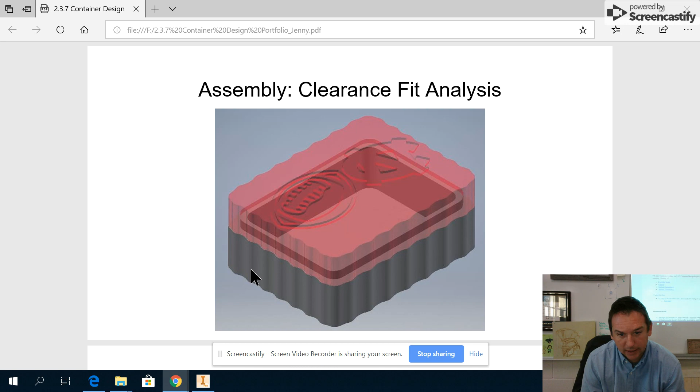Today is the last component of your portfolio for your container, other than the writing reflection statements: your assembly. So you can also analyze clearance fit in the assembly process. There's a lot of things you can analyze in assembly, but specifically for us, we can also analyze the clearance on this. So let's get started. This is a quickie.

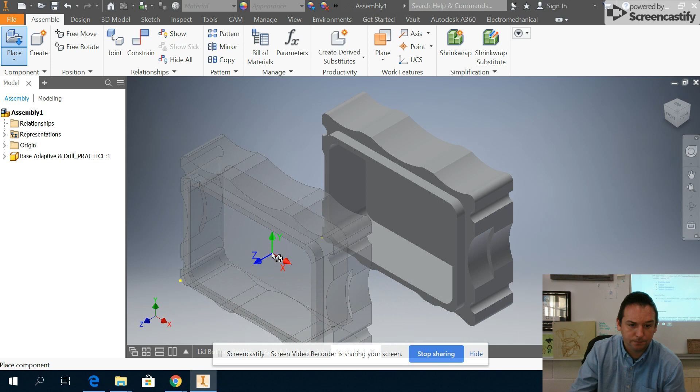So file, new, assembly. You do have to have both your parts complete. You're going to place, find your base, open. Okay, so you can left click and then right click and OK when you're done. Place your lid. Just right next to it's fine. Right click OK when you're done.

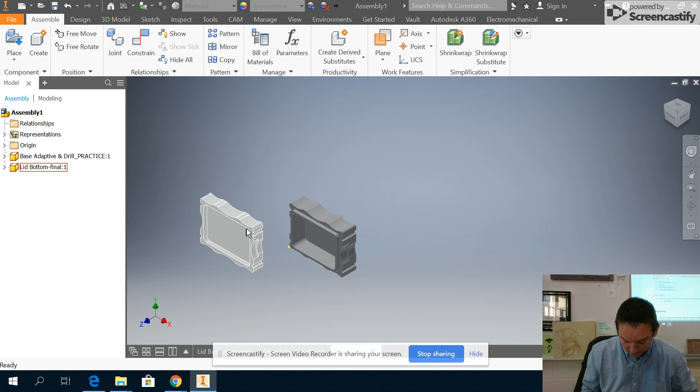And now, if you remember this from Intro to Engineering Design, you're going to apply one mate and two flush constraints. So mate is like gluing surfaces together. So you can mate the top surface of your base right there to the surface on your lid. So we'll apply that by selecting constrain. If you hover over these icons, they tell you what they are. So there's the mate option. And then when we do the flush option, you'll just select this.

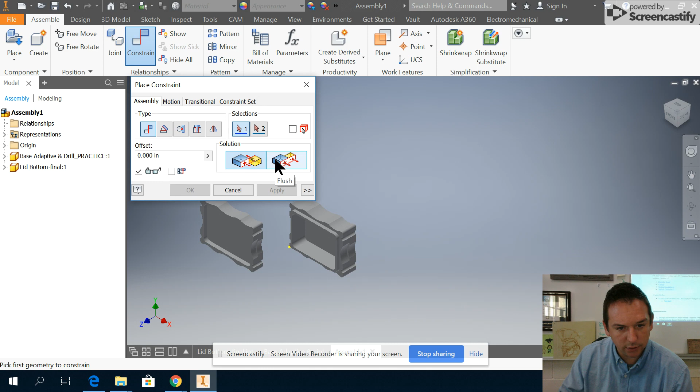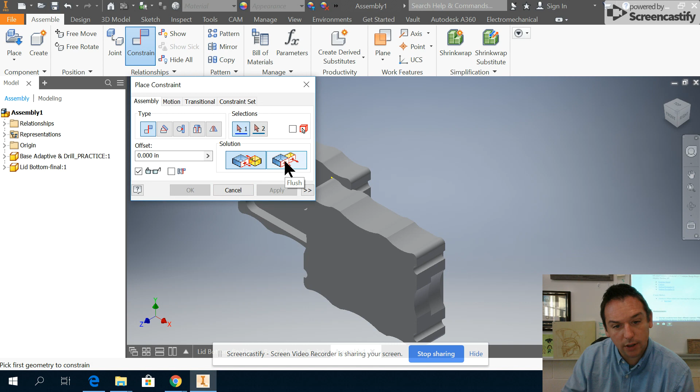So first is the mate. So again, let's try to mate this with this surface and then apply it. If you don't apply it, it won't work. Next, we're going to flush. So let's go back to constrain, select the flush operation, and basically it's aligning surfaces together. So we're going to align this surface and this surface together, apply, and I'm going to go out of it, and you can kind of see now they're aligned together.

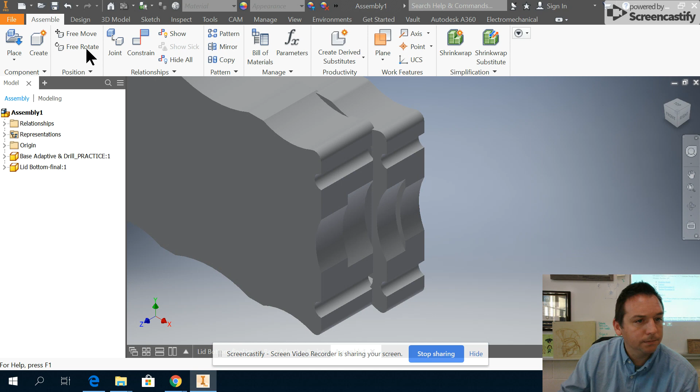And we're going to do the same thing for these outside surfaces here. Constrain, flush, outside to outside, apply.

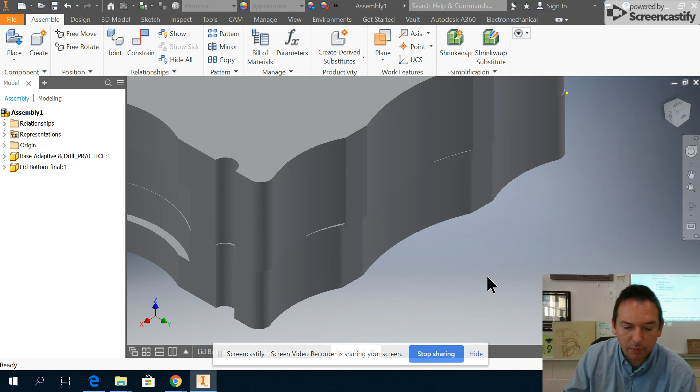So you can analyze using the view cube. You know, there seems to be some misalignment, so there's some issues there that are concerning. Probably not enough for me right now to restart the whole project, because that would require a lot more extra time. So it's a flaw that I probably would fix if I'm going to sell the product, because if I'm selling the product, then there's no room for error, right?

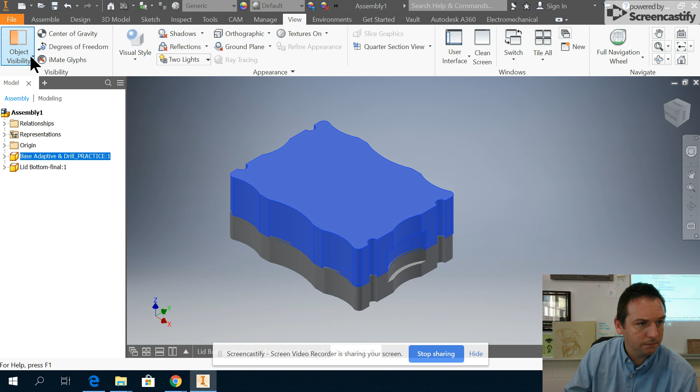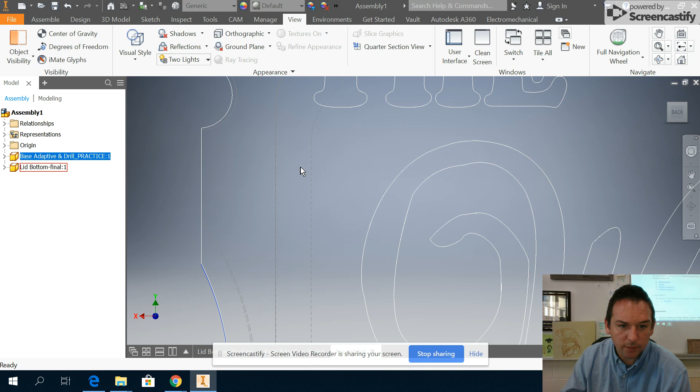So next thing you can do is analyze the assembly. Shaded with hidden edges. Let's see here. Wireframe with hidden edges. Kind of like that. You can get some visual evidence of clearance in here. Zoom in. And actually you can kind of see where there's that 0.00275 clearance in the corners.

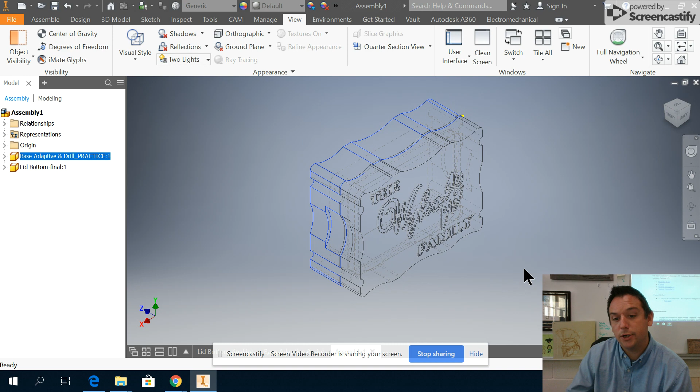So you can analyze. I kind of like view, visual style, wireframe with hidden edges, and that's another way you can view your assembly and analyze for interference. There's probably all sorts of different ways. So anyway, go ahead and make screenshots of this information and add it to your portfolio to show your assembly and your analysis of interference.

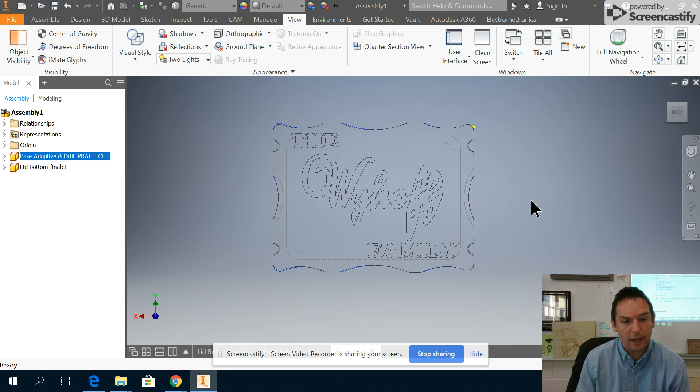And that's it. So go ahead and once you do that, you finish with your reflection statements, problems that you experienced through this whole process, how you overcame them, and then an overall learning reflection will complete your portfolio.